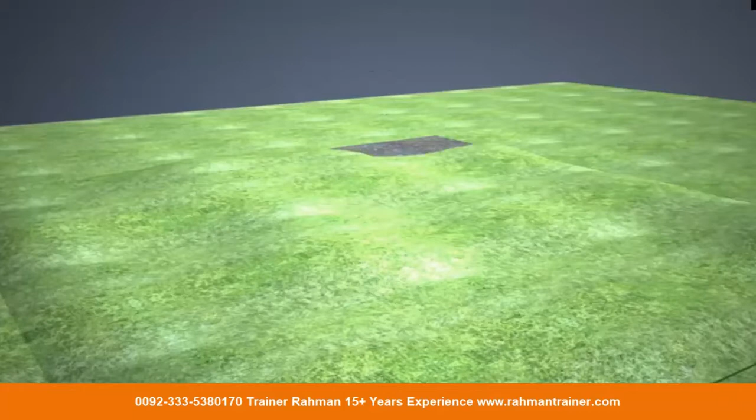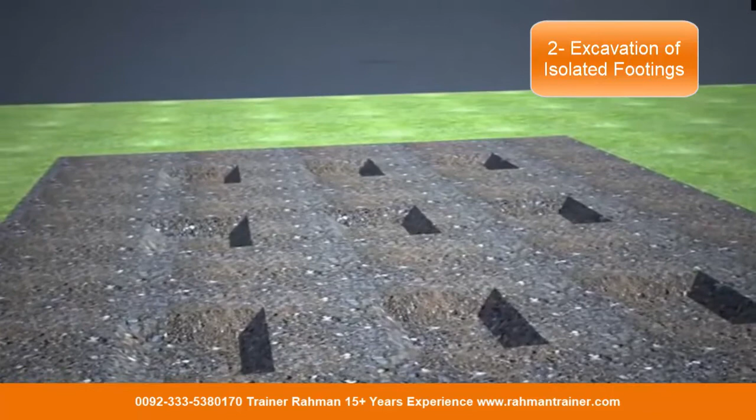There is a level surface, marking is done, and then excavation of foundation is done. Once the excavation of isolated footing is done, then lean concrete is done and steel and formwork is done for the foundation.

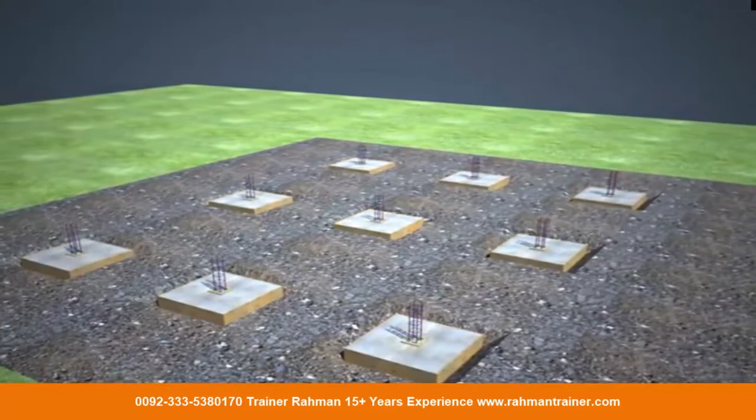Column steel is installed and concrete is poured in the foundations. Then starters for columns are casted and steel for columns is installed. Backfilling is done and shuttering is done for columns.

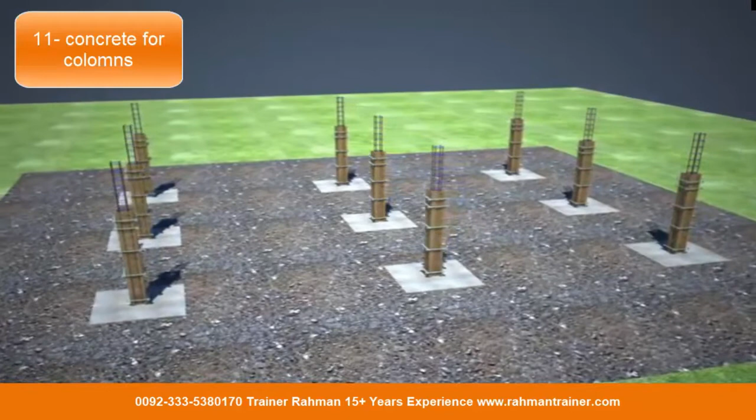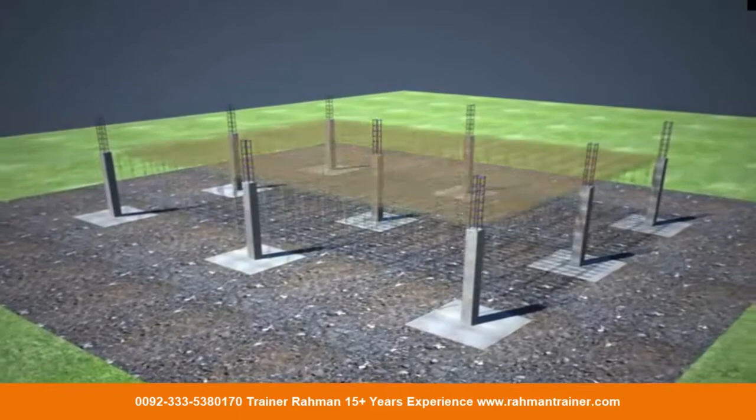Once the shuttering is done, pouring of concrete is done in the columns, and the next day shuttering is removed. Curing is done, and then scaffolding works are done for slab.

Then shuttering work is done for beams and slab, and steel is installed for beams and slab. Once this is finalized with electrical works, then concrete is poured in the slab. In the first floor, steel for columns are installed and shuttering is done.

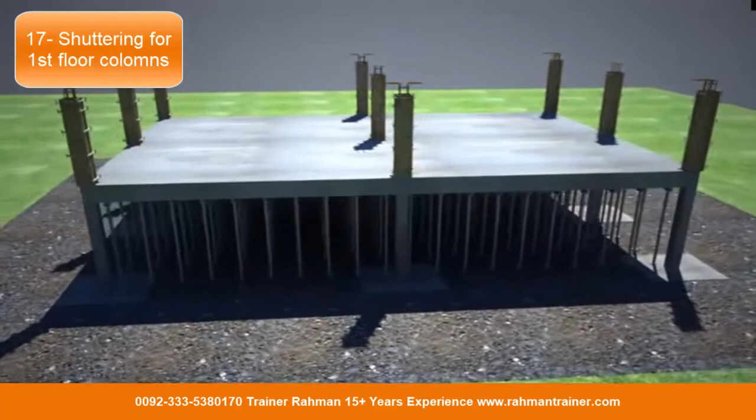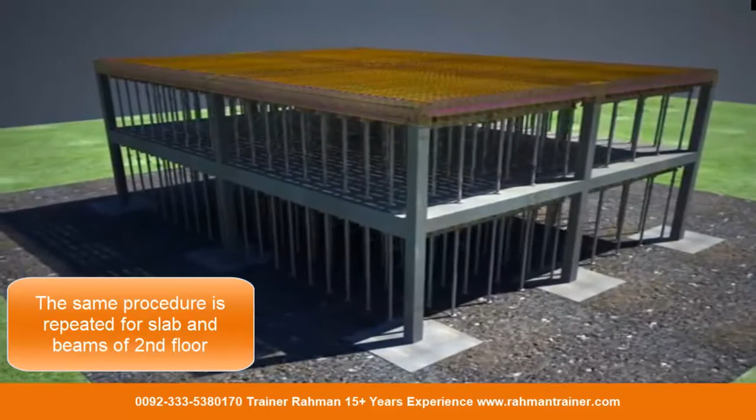Concrete is poured in the columns and shuttering is removed. The same procedure which was done on the ground floor is repeated on the top floor. The only difference is the height increases. This is a frame structure building.

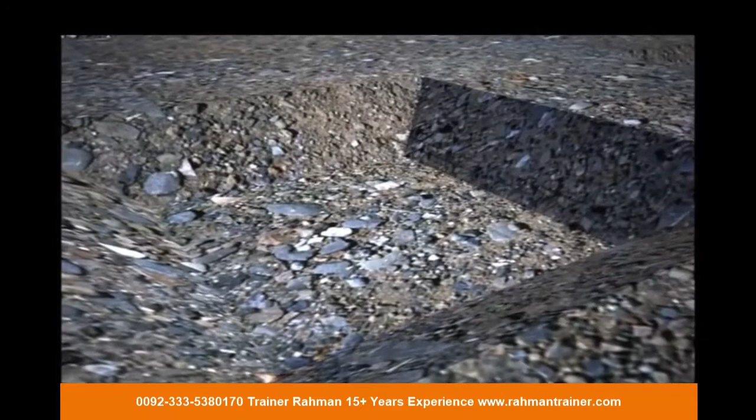Now we will have a close look on the process. Excavation of a column is done. This is an isolated footing.

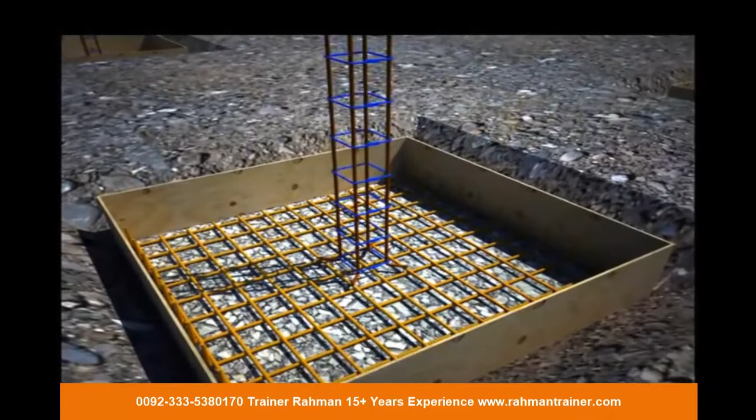Lean is done. After the lean, steel is installed for columns and foundations. Formwork is done for foundation and concrete is poured.

Once the concrete is poured, starter for columns are installed and steel for columns are installed from foundation to first floor, ground floor. Shuttering is installed for columns

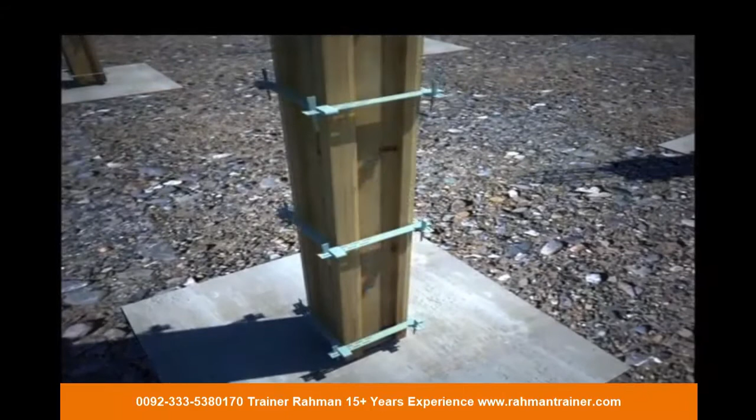and properly calibrated for verticality. You can watch the steel inside the shuttering. There is a cover maintained and then concrete is poured in the columns as per the specifications.

Once the concrete is poured, next day the shuttering is removed. Scaffolding and shuttering for columns and beams are done like this,

and beam steel installed first and then steel for slab is installed as per the bar bending schedule, which is prepared by quantity surveyor from drawings, and then the concrete is poured as per specifications.

For first floor, the same procedure is repeated again: steel of column, shuttering, concrete pouring, shuttering and scaffolding for slab.

And now we will check the reinforcement details. Foundation reinforcement. There are main bars and there are distribution bars.

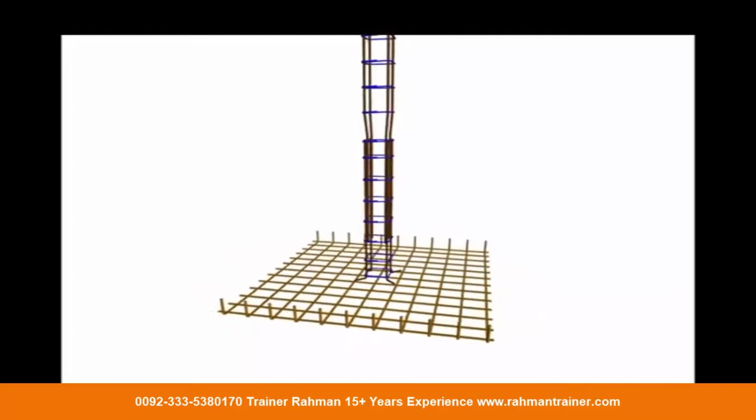You can see very closely the steel for column, the rings placement, the spacing placement. These are as per structural drawings designed by structural engineer. It is as per load calculations.

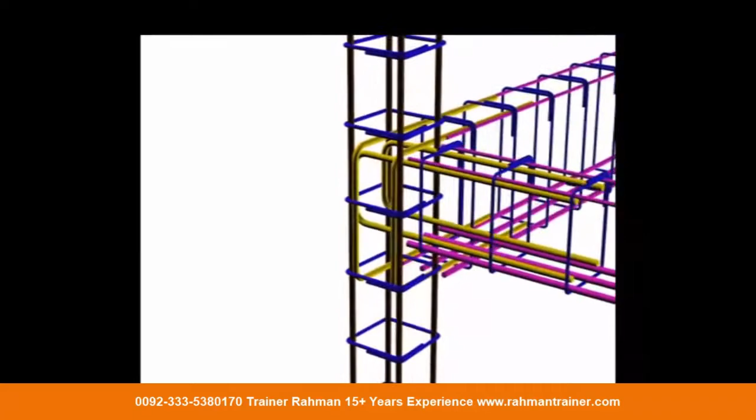On first floor, at a corner, this will be the joint. The beam size may vary as per the load calculations of the designer. The slabs are given, the ring spacing can change. The beams take the load of slab.

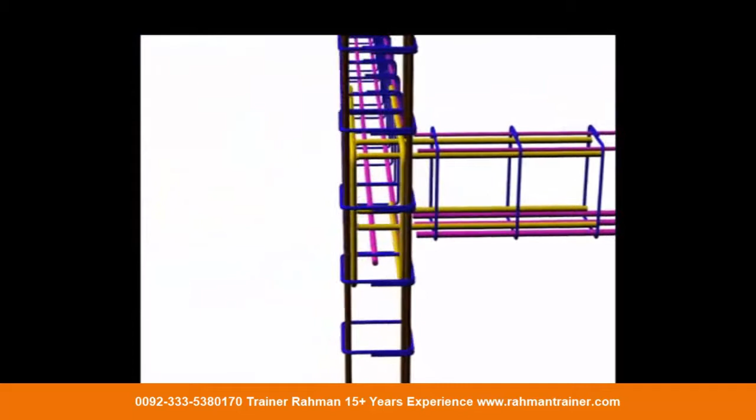This is on the first floor junction. It is not the corner, it's a junction. You can watch the main beam is of more depth than the side beams which are resting on that main beam.

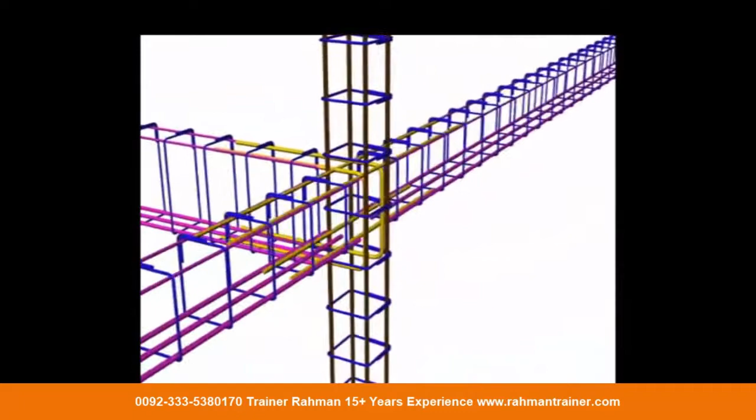This is first floor central junction. You can see this, that the main beam which is taking the load of all the beams and the slab is more in size and depth than the other beams.

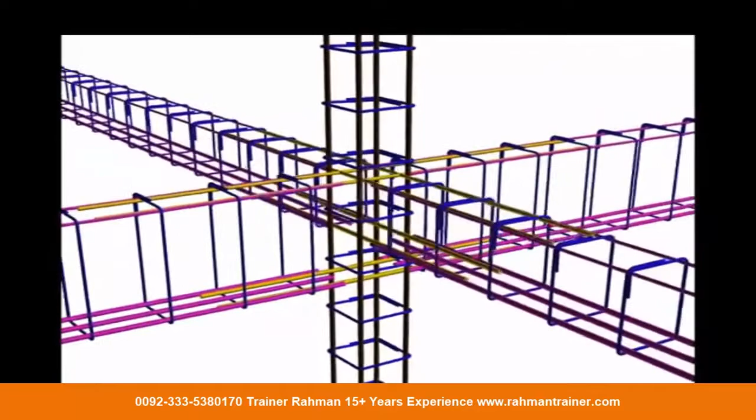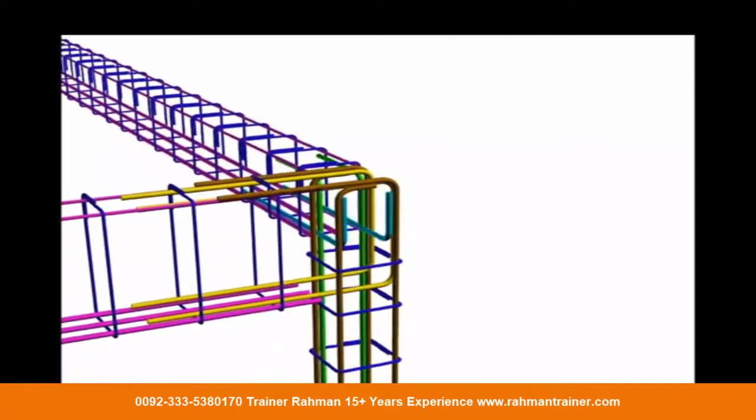So this is all work of designer which is already there. You just need to understand that this is how things are working, because you will plan the activities, and what activities you are planned, you will use the quantities given by quantity surveyor. You can calculate the steel bar bending schedule, how much steel you are using at which stage of your plan.

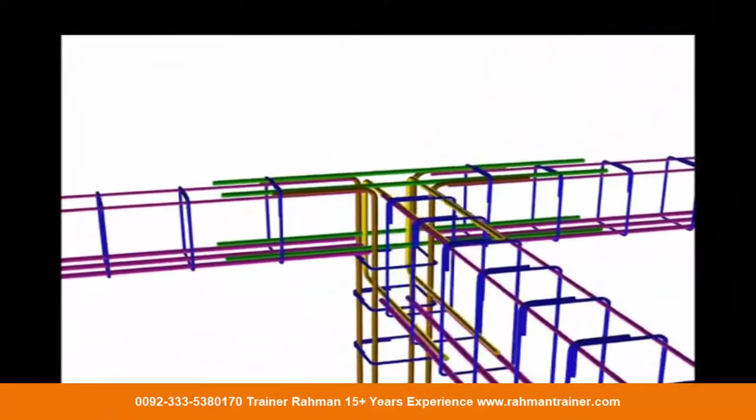So quantity surveying job, drawing job, advanced using data on advanced level of Excel, all these things are mandatory in order to plan good. You must understand these things. You will not do these bar bending schedules, but you have to understand these things, that how the construction actually is done in the field.

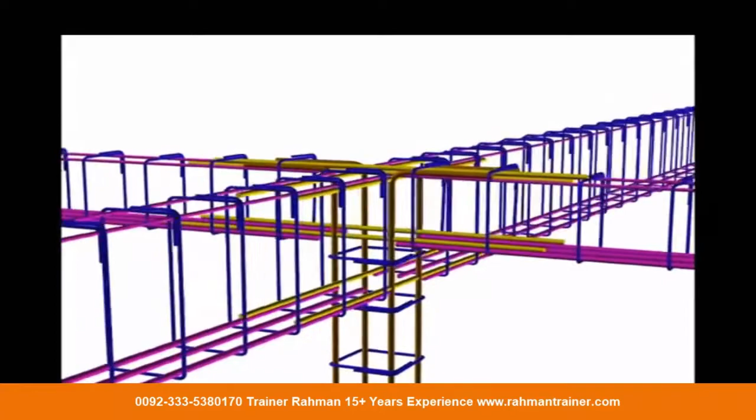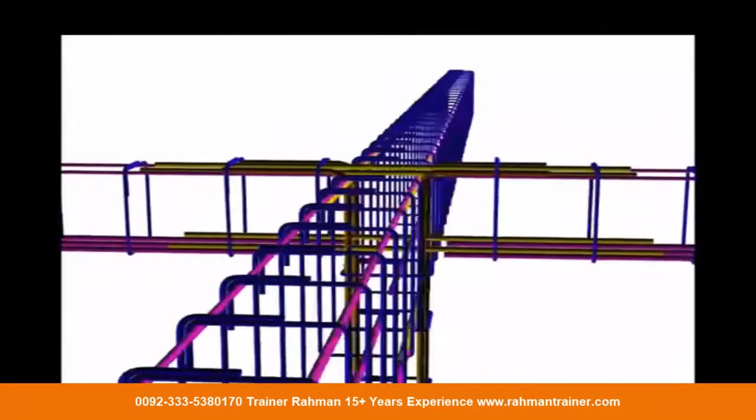I hope that this video will clarify that for planning engineer job, quantity surveying skills, advanced Excel skills, and the latest tool for drawings, Revit, is mandatory nowadays.